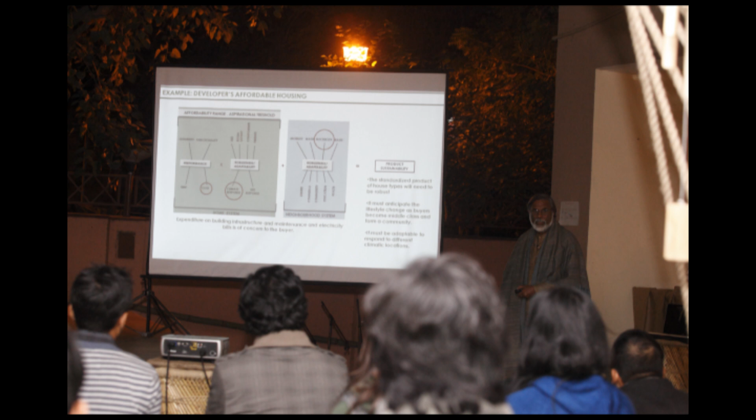My thesis is that a time has now come where some of the innovative energy that we are seeing in the work that SEED is doing, or many other such organizations are doing, using what we call traditional materials with new scientific know-how to serve contemporary needs, generally in small town and rural situations. Now the time has come to look at what the world is going to move towards inevitably, which is a lot of people living in cities, and to see how this kind of thinking can be integrated into this new world that is coming upon us.

So the title is Sustainable Urban Communities, Challenges and Opportunities, and this kind of picture is now quite familiar to people who are living in cities like Delhi.

Most of us know this, but it's worth recounting the story once again. In 2011, there are 3 cities with population greater than 10 million and 53 cities with population greater than 1 million. Over 833 million Indians live in 0.64 million villages, but 377 million live in about 8,000 urban centers. That's what we see today.

It is predicted that by 2031, there will be 6 cities with populations more than 10 million. A key question is how many would live in medium and small towns, bridging the transforming rural and urban India.

It's quite clear the way the developmental juggernaut is moving, and with growing populations, this is going to be the form of life for a majority of us, say by the middle of the present century. And so we have to pay attention to that.

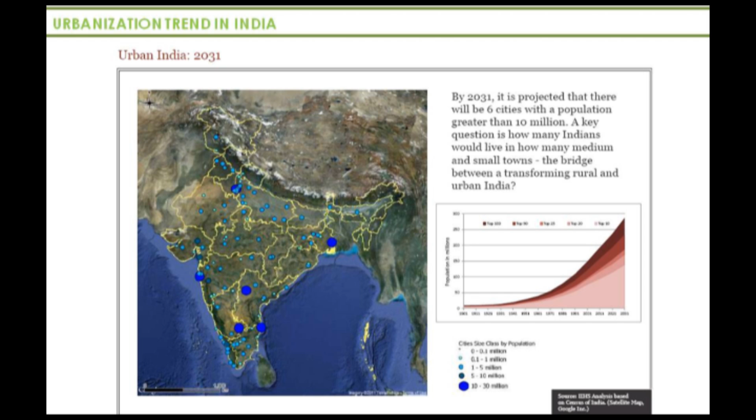That form of living in high density concentrations is inherently a burden on the natural environment, and we have to pay attention to that. Demand for housing, here's a prediction.

Most of the demand for housing is going to come from the low income and middle income segments of society. It is this section of our society that is not being adequately addressed by the formal market or the formal provision of housing at the moment.

Although there's a shift in this direction now as the upper income housing is getting saturated. I think looking at simple homes for simple lives, not high-end homes for expensive and highly consumptive life, is the zone where a lot of us are going to find our mission to be fulfilled.

These are the pictures we are familiar with of the form this housing is already taking. This has to do with land economics and politics and the business model that developers follow, etc. But this is becoming the tendency of cities to live in this kind of building, and you can see this happening even in the small and medium towns.

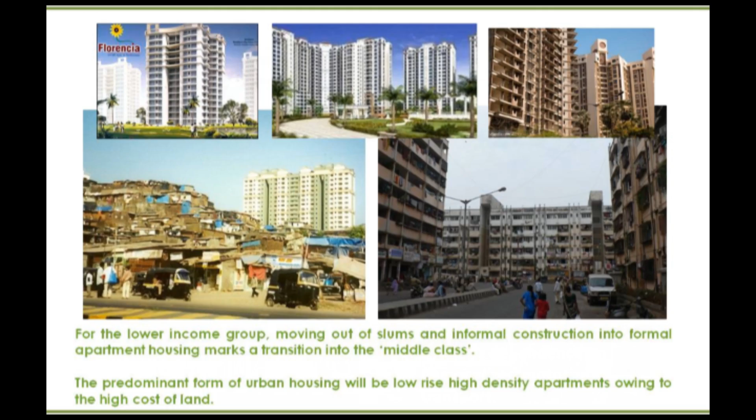So apart from the fact of building in this very inhuman and inappropriate way as we grow, as the cities develop, there are two other things that are happening in our cities, and these have serious implications.

More and more people, as they move into the middle class, are looking for higher levels of comfort in their homes, because you are accustomed to that when you go to the cinema, when you go to the restaurant, when you go to the hotel, even when you go to college nowadays, or you go for a performance anywhere—you are accustomed to that. Even in your car, you're accustomed to that. So you're beginning to look for much higher levels of comfort at home.

Air conditioning is a big issue for us. And similarly, as you save a bit of money, you want your own freedom of movement, and you want to buy yourself a private vehicle. These two things are going to run us underground very soon. Well, that Nano appeared and it disappeared.

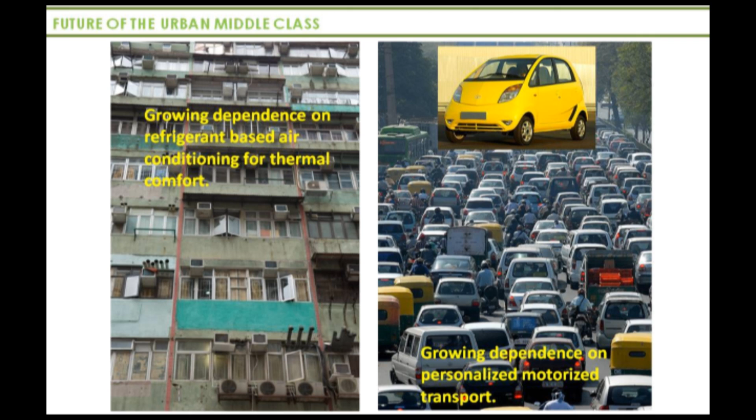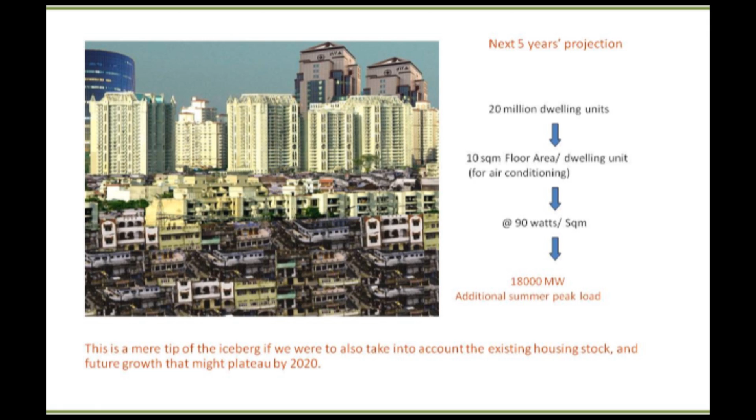If you assume a small proportion of middle-income homes come into air-conditioned space, in the next 5 years, following the prediction of 20 million dwelling units being built, we will have 18,000 megawatts of additional summer peak load because of such building. There's a real huge pressure on carbon dioxide emissions and demand for energy attributable to a changing lifestyle looking for higher levels of thermal comfort. In a survey done a year and a half back, we established with data that the substantial rise in consumption of electricity in homes is directly attributable to moving into air conditioning.

So we have to see how we design for comfort without getting into air conditioning or conventional air conditioning.

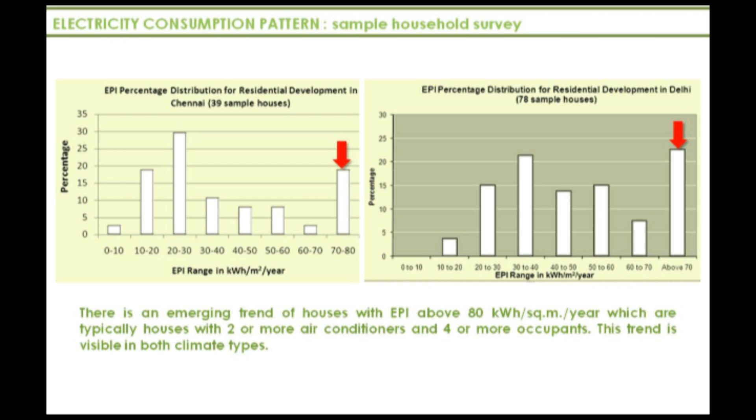The other thing is that when you build so much and so fast, and if you build in cities with large span RCC frame, tall buildings which have to resist earthquake as well as wind loads, and meet all kinds of fire and safety codes, when you build like that, in comparison to traditional building in small towns and villages, the building itself is inherently much more energy consumptive in its materials of construction.

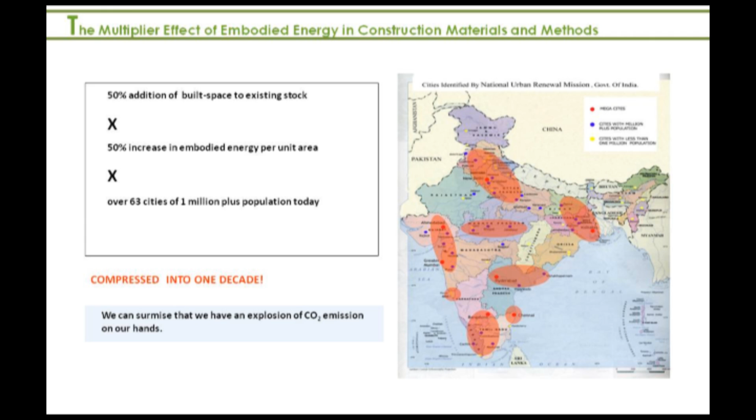If you're going to add 50% of built space to your existing stock very soon in the next 10 years, and multiply it by another 50% increase in the embodied energy per unit area of floor space produced, and you do that over 63 cities of 1 million plus, and compress that in a decade, you can have an explosion of carbon dioxide emissions on our hands. So just the fact of building so much at such a rapid pace is a problem in itself, and building in cities in the manner we do today is the next big problem.

At a rough estimate, it is possible to bring down carbon dioxide emissions in the construction of buildings by at least 18, or maybe even 25%, if you are truly creative. It simply means that if you adopt alternative materials and techniques of building in cities, rather than saying we're not going to build in cities, we're going to build in villages because that's inevitable, you're going to build in cities, you can substantially replace existing highly consumptive methods of construction with more sustainable methods and materials, reducing the impact of embodied energy.

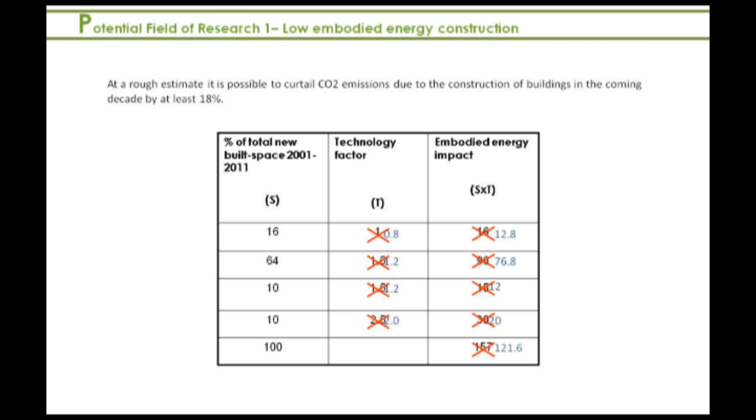Here too, we did actual calculations looking at buildings that have been built, and did an analysis of the embodied energy in these buildings, looking only at the structural systems and external walls. We found that if you give preference to low-rise buildings, G+4 in residential development, and use low embodied energy materials for external walling and structural systems, you can potentially bring down the embodied energy by anything between 20 to 40% compared to building as usual.

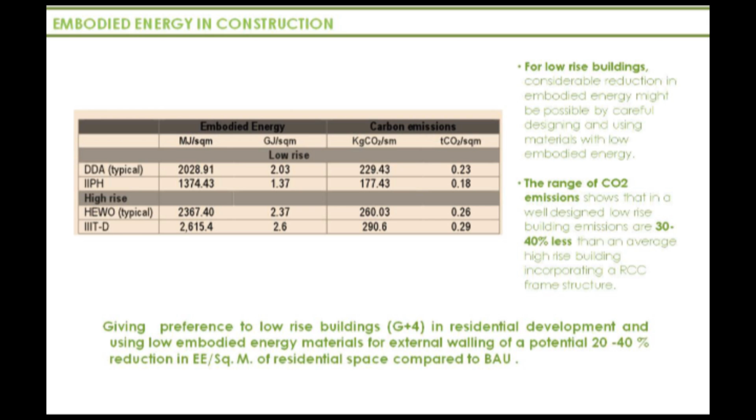So now, if you go back to the motor car, for instance, one of the things about mobility is that if you want to reduce the desire or need for mobility, you have to build compact. Cities have to be compact, relatively small, somewhat higher densities, and that's one of the reasons why things are going 10, 15, 20 stories high. But what we found is that you can build fairly high density at 4 to 5 stories, and that also enables you to use different kinds of construction techniques compared with the standard RCC frame and so on.

In the international discourse on energy consumption in buildings, it is often argued that embodied energy is of no consequence, but what is of real consequence is the operational energy used in buildings. But that's not so true in our case, where there's an explosion of construction, growing population, and a window of opportunity of just this decade within which you have to reverse the trend in increasing energy consumption and reduce your carbon footprint. Because in simple buildings, even today, it is only at about the 10th year that operational energy reaches equivalent to the embodied energy invested in the building at the start. So it's really very important to pay special attention to embodied energy.

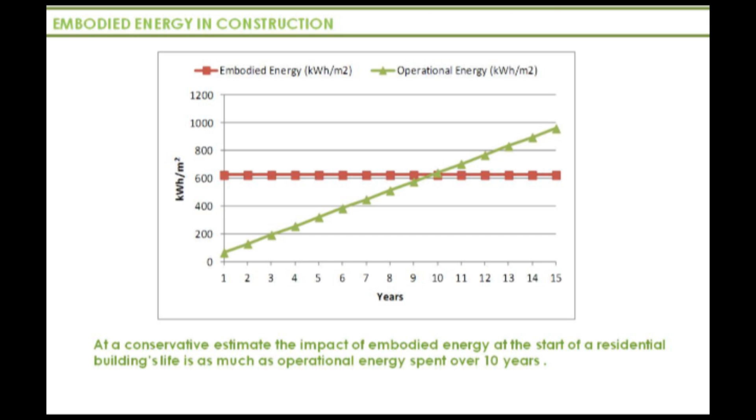Now I'll just go over a few examples of what some of the strategies can be. Even when you're building in suburban or rural contexts, I think it's very important, as our old villages always were, to build in very compact formations. Even when building for contemporary needs, build in compact formations, not to spread the buildings out, but to bring them as compact as possible.

In this particular case, where people wanted housing for industrial workers, they had actually allocated this entire zone for residential things. What they imagined was bungalow, bungalow, bungalow, road, road, road, car, car, car, and all of that. That's what they imagined. But what we found is that this is all you need to build. That's all you needed to build for all your needs.

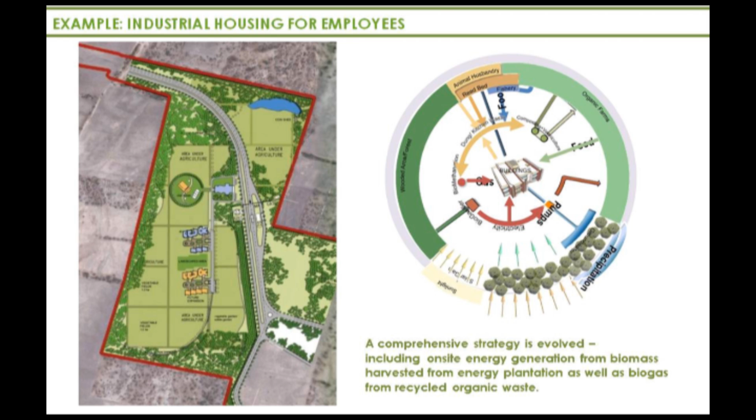And you can return everything else back to agriculture and forestry. And then, of course, the idea is that building compact also enables you to integrate all kinds of environmental systems. We won't go into that just now.

Even if you're building very simply, in this case it was 2-story houses, one of the opportunities we have is to think of how the fabric of the building itself and its structural mass interacts with its thermal behavior, and to design the structural mass of the building to interact with the cool evening or the cool night air or evaporative cooling, because we do cooling most of the year round in most parts of the country. Use that system as a way of obtaining coolth during the daytime and summer seasons, rather than relying on alternative strategies of mechanical or electromechanical systems.

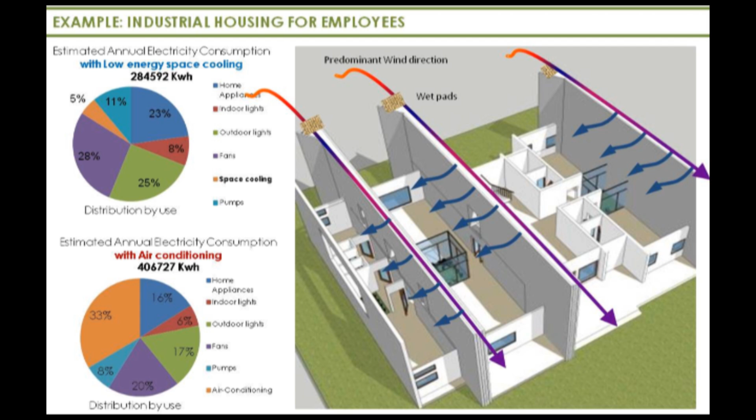And so here is an opportunity of using hollow walls and hollow floors through which cool air moves. And here's a sample house that was built. Hollow floors and hollow walls through which cool air moves to actually cool down the entire mass that envelops you in your room through the day and through the night, and then keep the building protected during the daytime. So this requires a new way of building and understanding the science of building physics, of the thermodynamics of the behavior of the structure.

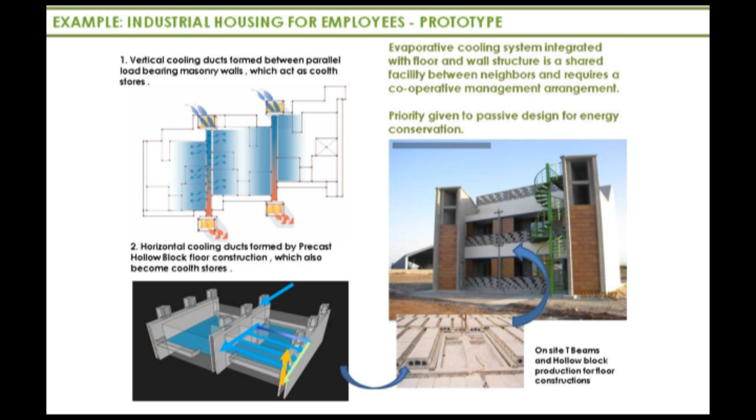Another important issue as we come into the middle class home, and we happen to be working with a developer for low income housing right now, is that going out and doing surveys and asking people shows that urban culture is an aspirational culture. Everybody is looking for a better kind of living, and everybody is looking for change. They are not looking for carrying forward their old ways, they are looking for new ways of living.

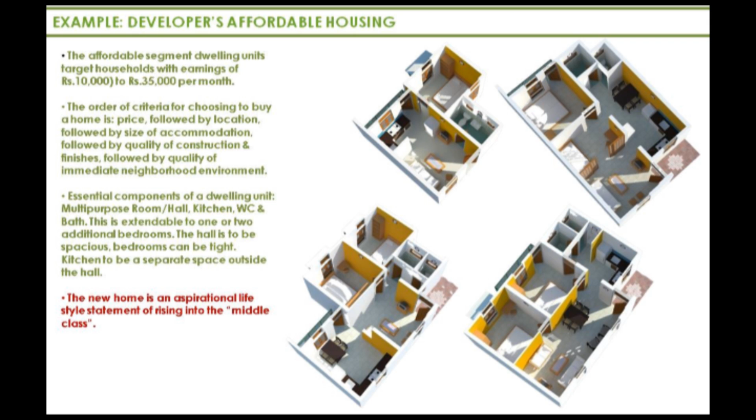And interestingly, the middle class home with its kitchen and its toilet and a place around the TV set, a separate room for the parents and another room for the children, is fast becoming the norm, no matter which section of society you believe you are in. And that seems to be becoming the aspirational norm. So I think even as one designs the new home, especially in the urban context with swift changes occurring, one has to understand the aspirational aspects of lifestyle.

And building in cities for lots of people together has a very long-term implication. A building that is built today is going to last over a long period of time. And if it is going to be affordable today, it shouldn't be such that it is a poor building tomorrow. It has to be such that it is even a better building tomorrow.

And so, a theoretical model, what makes housing? At the first level, people are looking for durability, functionality, cost, timely delivery - extremely important, especially if you are borrowing money. If I am borrowing money to pay a deposit, you better deliver the building within 10 or 11 months. Otherwise it's a cost on me, because I'll pay not only the rent I'm spending today, but also the interest on the money I borrowed. Time is extremely important.

That is then multiplied by that system being able to respond to different requirements of size, room layout, different kinds of components to be added, finishes to be changed, responsiveness to different kinds of climate, or adjustment and improvement of the building from its climate response point of view, and also a response to the site. So if this is what is within the building, when you put it together with other things - mobility, water, electricity, waste, combined with leisure, commerce, community, education and health - and this also as a system being adaptable and robust for the future, is what is actually required.

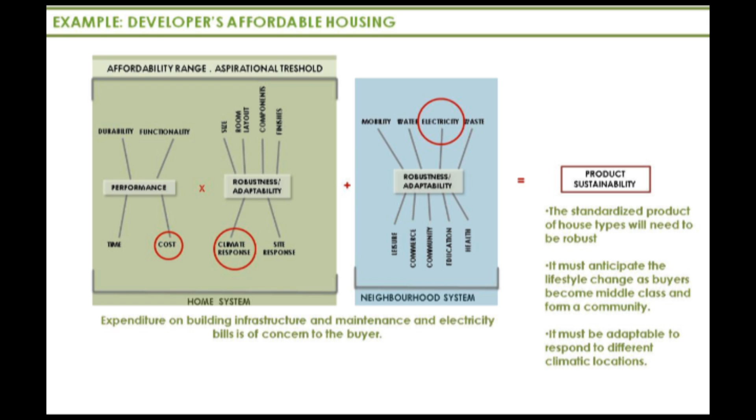You may need to have somewhat standardized modes of building if you're going to build quickly. Somewhat standardized, just like in Ladakh it's a somewhat standardized mode of building, but within that there is a lot of variation that's possible. So the same philosophy goes, but it must anticipate the lifestyle changes as buyers become middle class and form a community. It must be adaptable to respond to different climatic conditions also. You may have a preferred mode of building because it is very convenient, but it must be so versatile that you can adapt it for different climatic situations.

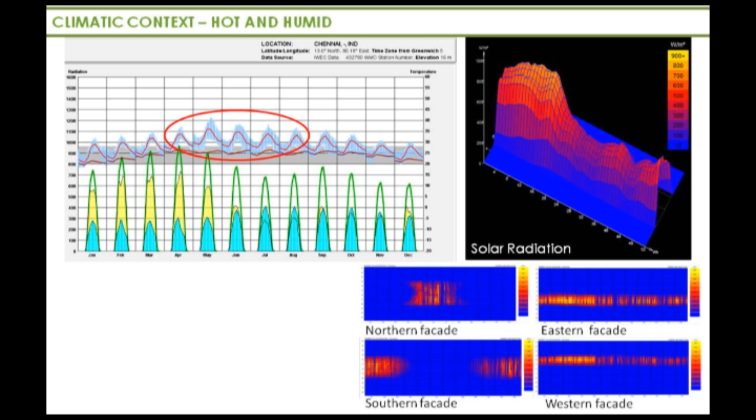And you have to take it very seriously. Why? Remember air conditioning - if you don't take thermal comfort seriously, the moment I get back into my house, I'll simply press the button of the air conditioner, and I'll have undone all the good work that I've done before. So I've got to take this extremely seriously. I've got to make sure that whatever mode of building I've chosen, it has been adapted effectively to use all passive strategies possible to minimize dependence on electromechanical means for obtaining higher levels of comfort.

And this is what we found. It was very interesting.

On the outskirts of a big metropolitan area, if you build 4 to 5 stories high in compact formation, you can achieve an economically viable model. You can afford the price of land and the type of house, you don't have to spend on lifts or pumping water up, and you get a lot of people living together sharing facilities. So you get a dense urban fabric, but it is about 4 stories high.

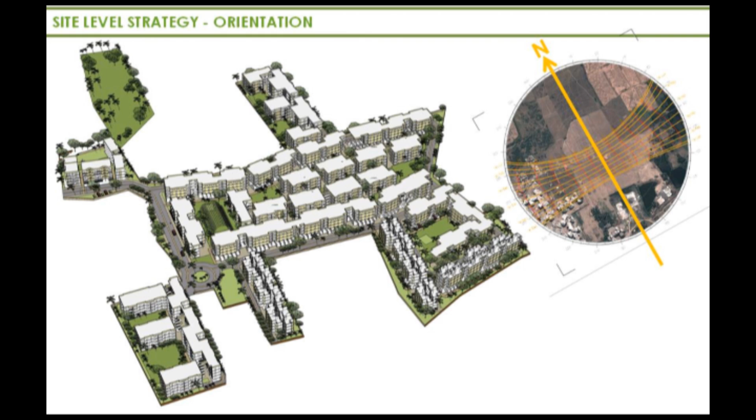Here's a very interesting finding: you can almost adopt a standardized bay, meaning standard spans. So if you're using formwork or shuttering, it can be very simple, and your investment in tools and equipment required for construction can be very small. You can run it as a load-bearing system up to 4 stories high. Now here's a challenge.

You can run it as a load-bearing system 4 stories high, but what we wanted to do, we were not convinced we were able to do. Eventually this has come out to be concrete with very high fly ash content, up to 57%. But what we would have loved to do is rammed earth, 25 centimeters thick, and if it needs reinforcement somewhere, build up to 4 stories high with this.

Within this, there are openings left so that you can begin to combine the spaces, making an opening to combine into the next house. So adaptability, extendability, modification of the internal layout, and a structural system which is environmentally friendly are possibilities, but it does require some careful working out.

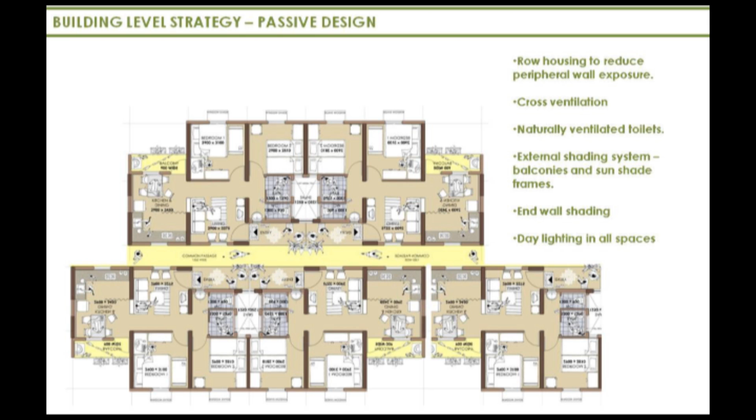We were talking about embodied energy to start with, but we do have to look at operational energy later on. Consumption of electricity must be disciplined. There is a limitation to the size of electrical connection a house is permitted, but it's worked out such that all your conveniences can be powered with this much connection. Each house is metered, and similarly water supply would be equally metered. And this is the aspirational kitchen.

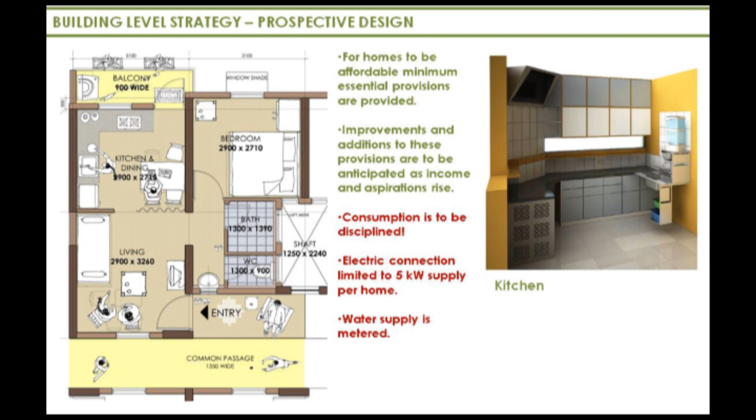Progressively you will want to reach a stage in life where you call yourself a middle class home. All kinds of opportunities for design of the building fabric. And when it comes to community level work, there's more opportunity.

Systems on the rooftop, systems on the ground, and let's not forget one important thing: every city is going to generate and produce its own waste. There are huge opportunities for working with waste of the city to produce new building material. There's a diagram that explains how local waste can be recycled for different purposes.

Here's just a picture of a typical home we see everywhere, where there are any number of elements which can be fabricated and constructed out of the waste of the city. So apart from using traditional materials, recycling waste is another opportunity for innovation.

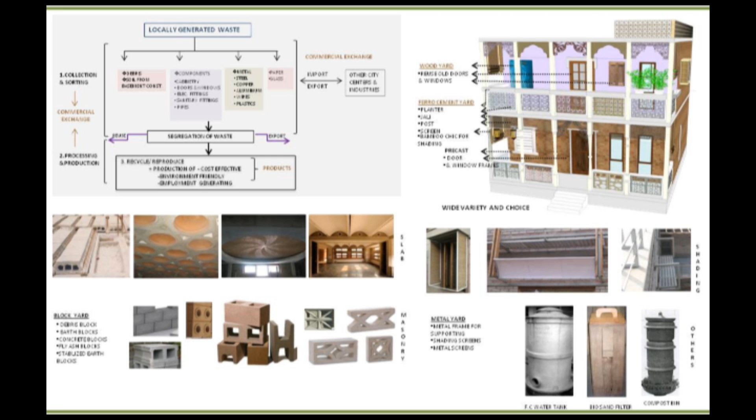It is a misconception that all technologies and methods in design integration towards a low carbon future already exist, which is what a lot of people will tell you—that all the new technologies required exist and you simply have to adopt them. Also, climate conditions, lifestyles, aspirations, availability of materials and skill, and economic capacities of the vast majority of citizens call for innovative solutions appropriate to their needs and affordable. They don't exist today for the city's requirements, and this calls for an intensive program of research and innovation.

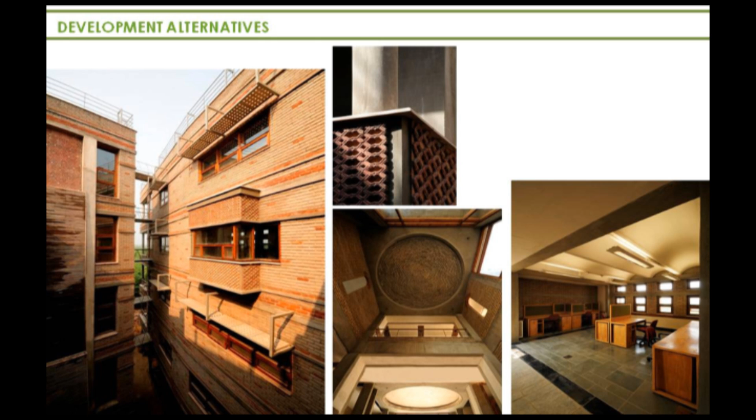We've seen this before, a great inspiration from Laurie Baker. We've seen this work coming along, and Auroville, working with earth. We've tried to integrate some of that thinking into modern or contemporary buildings for contemporary needs, as a development alternative. And we've seen this kind of work.

But I still feel that one need not be a purist in our approach to the use of materials. It is a question of finding opportunities for using low embodied energy and natural materials into the complex systems for urban provisions.

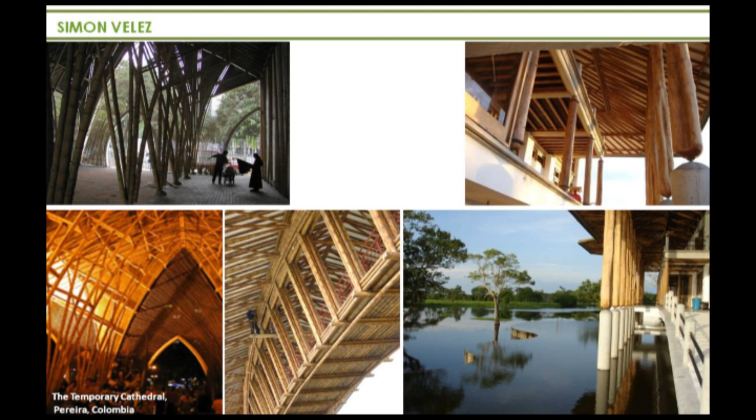This is an important point: that innovation should be of a simple technology, using scientific knowledge to make simple products to obtain enhanced environmental and functional performance, involving low investment in R&D and production infrastructure. This is a system for distribution of income and enhancing knowledge locally. So it's not only about recovering traditions, but using those as a platform for advancing further.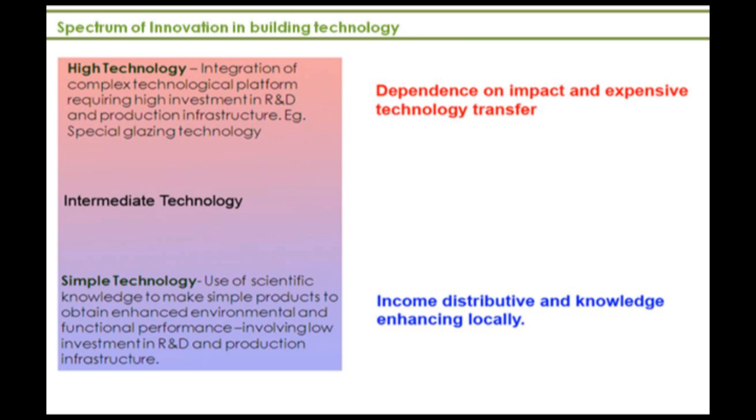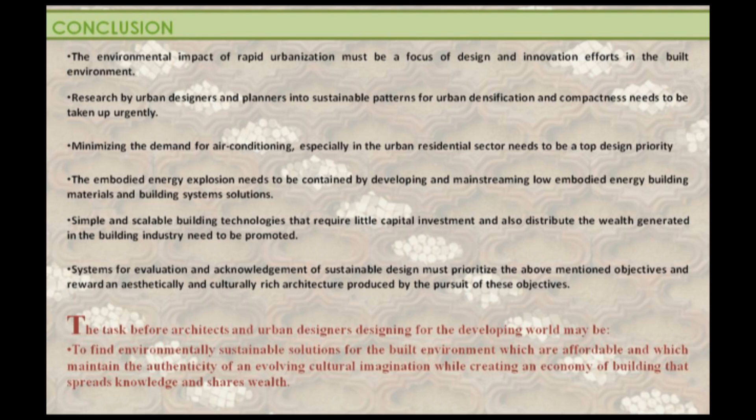I will just read the last bit here. The task before architects and urban designers designing for the developing world may be to find environmentally sustainable solutions for the built environment, which are affordable, which maintain the authenticity of evolving cultural imagination, while creating an economy of building that spreads knowledge and shares wealth. Thank you.